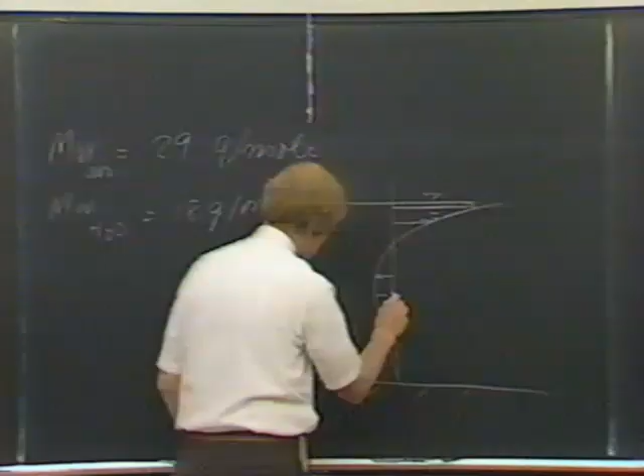The other problem, that is what the shear stress is on the bed, is complicated by those factors, that return flow. But usually the return flow is very much lower than other currents. Recall I drew a profile of the bed that looks like this. The shear stress due to this return flow is usually quite small. That 1/10 of tau s is just a kind of a rough number, but it's usually very small, and it doesn't affect the erosion of the bed very much.

But it does affect the direction of transport. That is, if the waves are stirring up the bottom, and there is even slow motion of this sort, then it can carry large quantities of sediment. So this tau resulting from this isn't too important as far as sediment transport is concerned. It is important as far as calculating wind setup. Remember that.

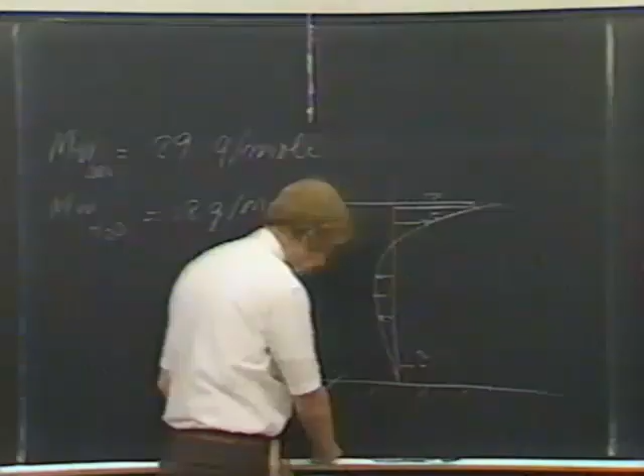I should also point out that the other factors that determine the current are the resonance that we talked about, the tidal current, and the oscillatory motion under waves. The tidal currents I've only alluded to, and I should say a few more words about that to clarify them.

The reason that tidal currents occur is that the ocean surface rises and falls. The effect of the sun and the moon on the water in the estuary, you can forget about that. The source of the tides and currents in an estuary are the rise and fall of the ocean at the estuary mouth. So when the ocean surface rises due to the tides, water flows into the estuary, and when the ocean surface falls below that of the estuary water, water flows back out. I'll show you some examples of that presently.

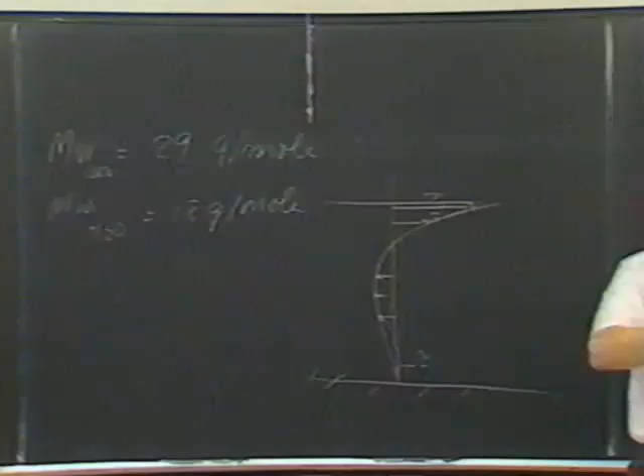But the point is, you can regard the water surface elevation at the mouth of the estuary as one of the boundary conditions, and not worry about the sun and the moon and so forth as far as the interior of the estuary is concerned. And of course that makes the water in the estuary flow in a progressive tidal wave up through the estuary. And the amplitude of the wave is damped due to friction in the estuary as it progresses up through the estuary. And I'll give you some examples of that in just a few minutes.

I'd like to turn to the topic of fresh and saltwater mixing that goes on in the estuary, because the processes in this so-called mixing zone are important in an estuary because they control sediment transport, salt transport, and play a big part in the biological system in an estuary.

If you consider first of all a system that has very little tide, so we can just look at the river saltwater mixture, then let's say something like the mouth of the Mississippi, which is a long delta. New Orleans is way up here somewhere, and this has a couple of passes in it in the delta out here, out into the Gulf. The tide range here is about a foot, or perhaps just slightly over a foot, so there's very little vertical motion in the Mississippi. And the water flows are appreciable.

Flows during the summer sometimes, or right after the snow melts, can be as much as 900,000 cubic feet per second. Really a large volume of flow. In that case, where you have a large freshwater outflow and a small tidal amplitude, you have very little mixing. And the result is, if we draw a profile along the axis of the estuary, of the outflow here, and I'll expand it vertically like this. Actually, I should go more realistic, where I've exaggerated the vertical scale.

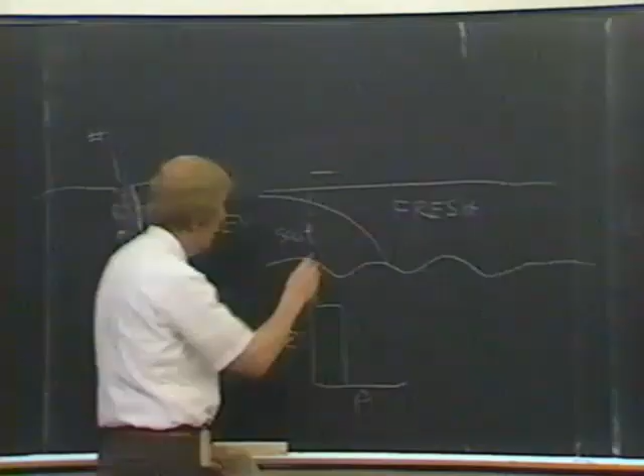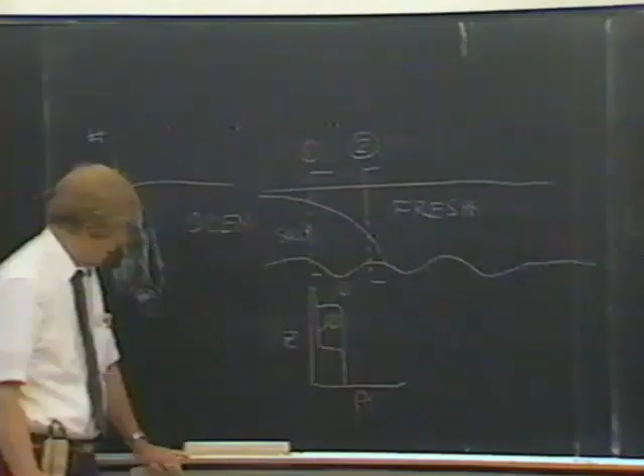Let's call this interface 1. So this would be 1. And if we go down further, call this interface 2, then what we find is that it looks like this. Very sharply defined interface. Sometimes at high flows, high freshwater flows, there are some waves that break on this interface, and there's a little bit of mixing there. While it's sharply defined, these waves can occur.

And the result is that there's a net flow, a slow net flow landward in the saltwater wedge, and a much stronger freshwater outflow at the surface. Well, this is the case in the Mississippi River. In most estuaries, however, there's a significant tide. In San Francisco Bay, the mean tide range is about 4.4 feet. So the mean tide range is about this much, and the spring range is not quite twice that amount. So you can see there's quite a bit of flow in and out of the Golden Gate.

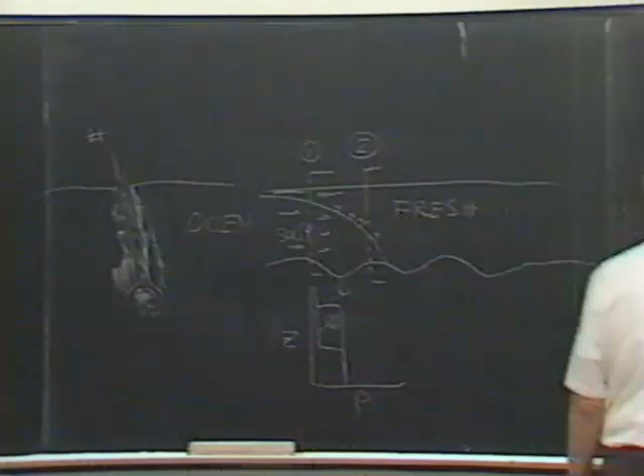And in that case, the estuary, before I get away from this, these bottoms: when the freshwater flow changes, if it is reduced, the saltwater wedge will move inland, and if it's increased, the saltwater wedge will move outward, particularly right in this region here, where the cross section changes a little bit with distance. When it moves outward, it often leaves a little pool of salt water in the depressions. I've exaggerated this because of scale, but it'll move out and leave this salt water, and the fresh water will flow over it. It'll just stay in this depression.

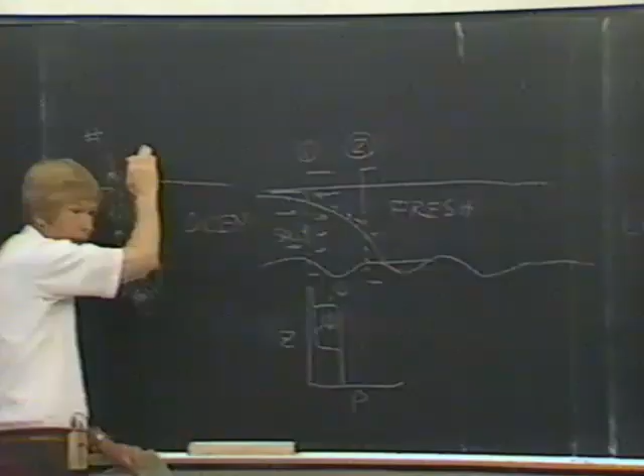This saltwater wedge problem affects water supplies upstream. New Orleans takes water out of the Mississippi and treats it, and so do smaller towns along the river. And if this wedge moves up into their area, then they get salt water in their intakes. A year before last, during a very low period of low flow, the wedge moved upstream and threatened these water supplies, and the Corps built a gravel sill, a low dam, out of local gravel in the estuary, and stopped the wedge at that level and saved the water supplies upstream. Then when the high flows occurred again, they just washed this out.

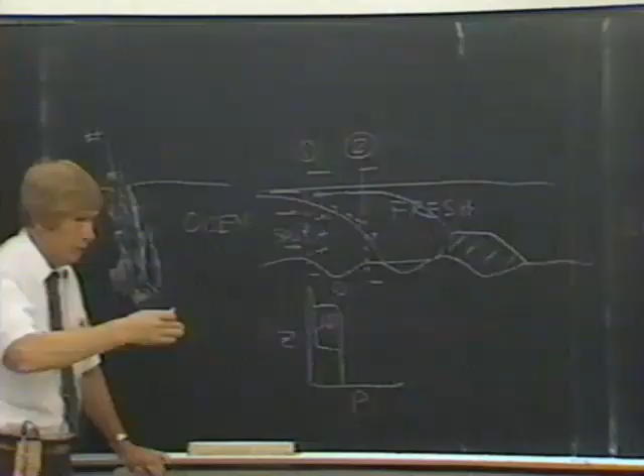It sounds simple, but stop and think a minute about all the things that were involved. First of all, they had to know that the sill would be high enough to do some good. And they had to know that it wouldn't be overtopped by the salt water going out. Second, they had to know that it would stay there during the flows under concern and wash out later. They determined those things by physical model studies. And because the situation developed quickly, they had to move fast for a government agency, and they built the whole thing in 1 month's time.

The savings in cost was incredible. If the city was without fresh water or had to bring fresh water from somewhere else, it would have been really a major problem. Well, that's kind of a sideline.

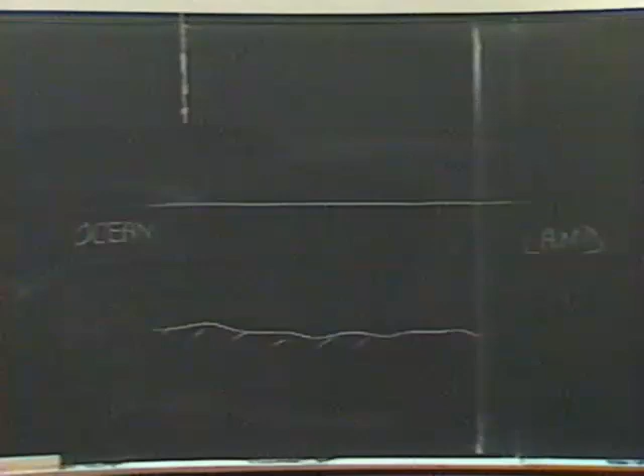In an estuary where there's a significant tidal current, the situation is a little bit different. This is idealized. But instead of having a wedge like this, the wedge has to move back and forth with every tide, with every rise and fall of the ocean. So this moving back and forth, together with the roughness on the bottom, causes upward mixing of the salt water. So you have a fuzzy, if you like, or a mixed apparent wedge where there's a net landward flow in the lower region. I've exaggerated that a little bit, but something like this, and a net outflow in the upper region.

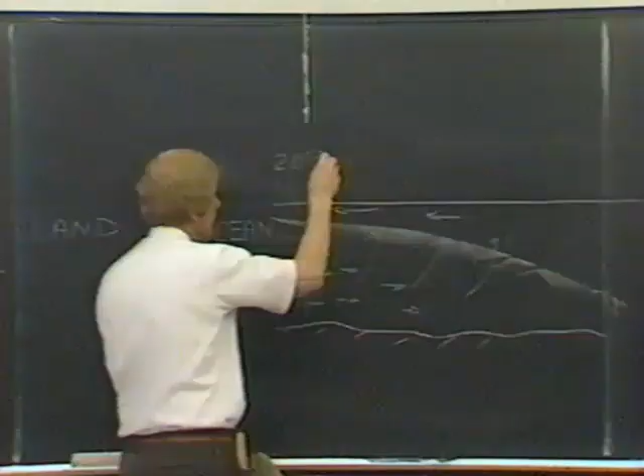And the salinity, it's mixed, and the salinity difference between the top and the bottom may be about 3 parts per thousand. That is not very great. Typically 2 to 3 parts per thousand. Up here, the salinity might be, say, 20 parts per thousand, and down here it'll be 22 or 23 parts per thousand. Not greatly different. And because of this mixing process, here it may be 2 parts per thousand further up, and down here maybe 5 parts per thousand, and so on up the stream.

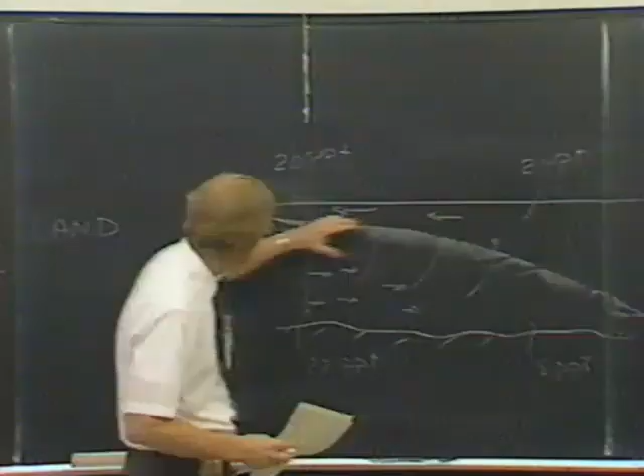So what happens is that as you go landward, the salinity decreases throughout the water body, but it maintains a difference between the top and bottom. Now this small difference, sometimes it's smaller than that, maybe 1 or 2 parts per thousand, led early modelers to believe that they could model this as a vertically mixed system. That looks like a small difference.

But it turns out that even that small difference causes a net landward flow on the bottom, an upward mixing of the more saline water into the fresher water, and that combines and adds to the water flowing seaward. So there's a net circulation in this way and back this way.

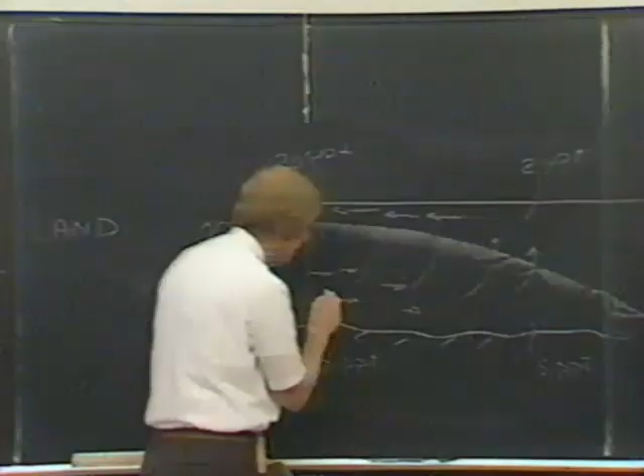The amount of that Q, if you want to call it Q ocean, divided by Q fresh, is on the order of 10. That is, the amount of ocean water that comes in and mixes upward and goes back outward is often as much as 10 times over this whole mixing zone, 10 times the amount of freshwater outflow.

You can see the implications of that for water quality management. It means that there's a huge amount of dilution that takes place of the river water that's due to the fact that the ocean water is coming in and mixing and going back out. It's lost, of course, if the freshwater flow is diminished to the point where you don't have this. I'm going to show you a little bit about that.

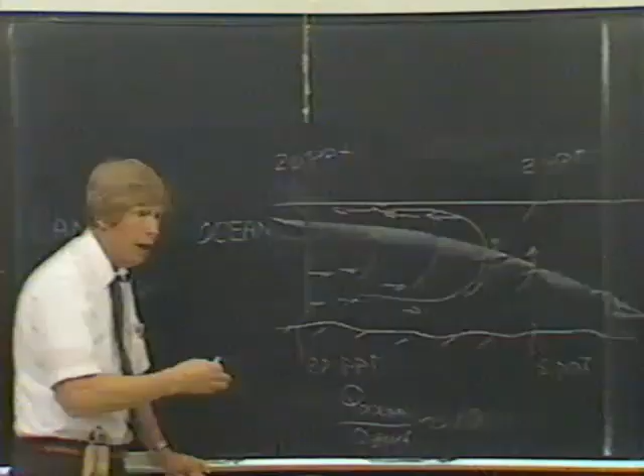As the freshwater flow is diminished for a given tide range, this will typically move up into the system where the cross-section is less. So reducing the freshwater outflow will reduce the amount of this mixing that takes place and move the whole system farther up into the system. You can see immediately the implications as far as water quality management are concerned. No?

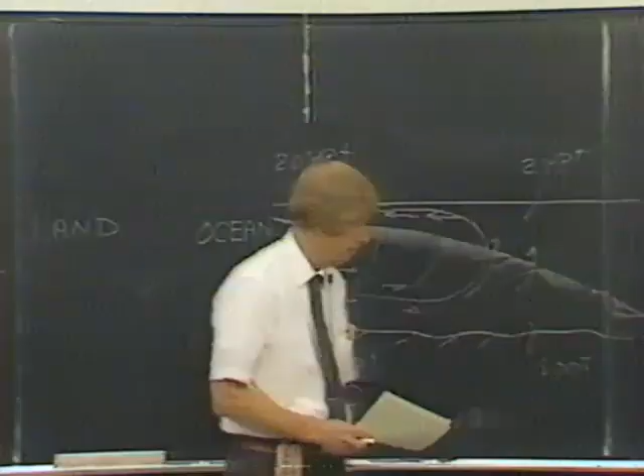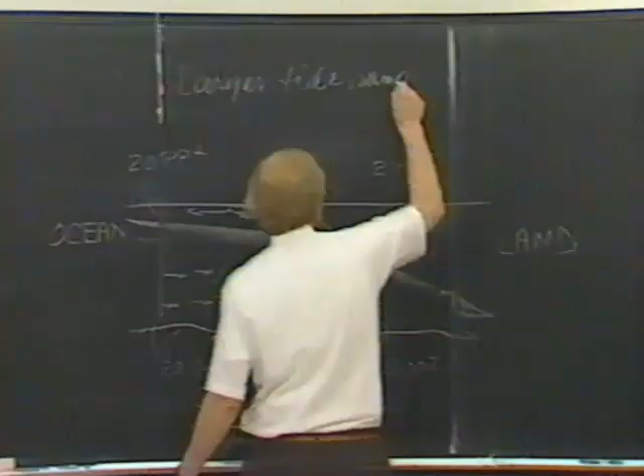When the tide range is small, I'm going to say more about this in just a second. Small tide range, relatively large freshwater flows. And this is larger tide range, smaller freshwater discharge. This is the more typical situation. The Mississippi is an unusual situation. This is much more typical.

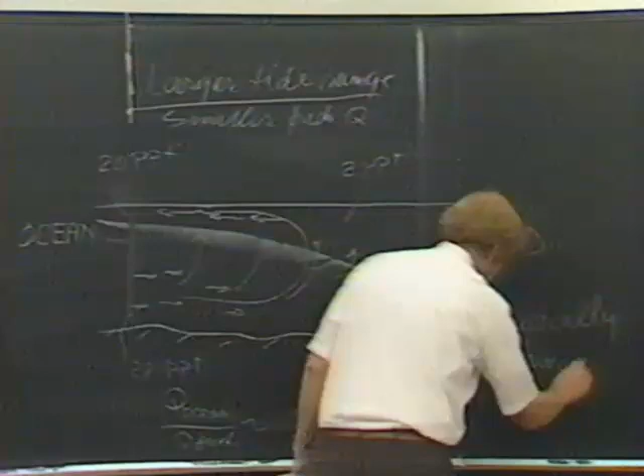These are referred to as stratified estuaries. And these are referred to as mixed estuaries, or partially mixed. But really, well, I'm going to give you some criteria in a minute. Really, the only distinction is degree. There are sometimes small amounts of mixing on the Mississippi, although it appears to have a sharp interface.

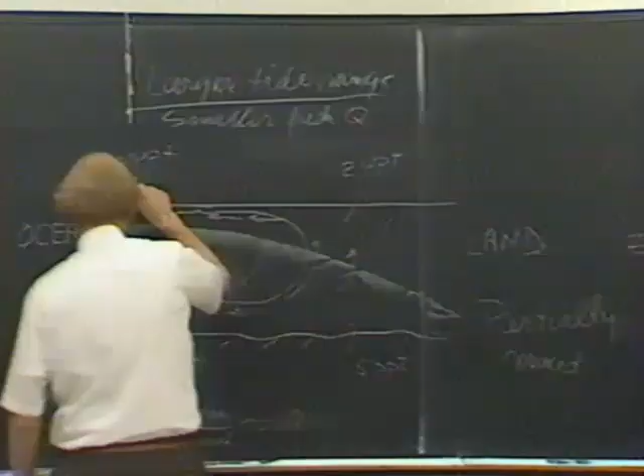If we plot the density here as we did there, let's say up here, what we find is something that looks like this. Usually there's a layer that's about uniform density near the bottom. And if we do it up here, what we find is something like that. I'm going to give you some numbers, yeah.

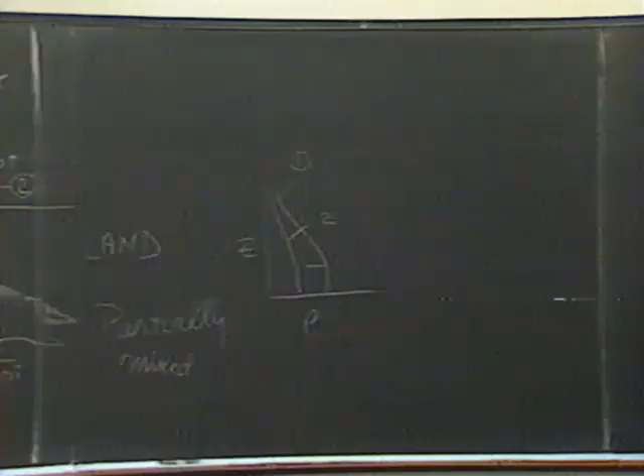But qualitatively, when you have a small tide range, so there's little disturbance by the ocean at the ocean end of an estuary, and a large freshwater outflow, the effect of the freshwater outflow dominates the system. Okay. When you have a larger tide range, then you have the combination of the two boundary conditions affecting the mixing of the system.

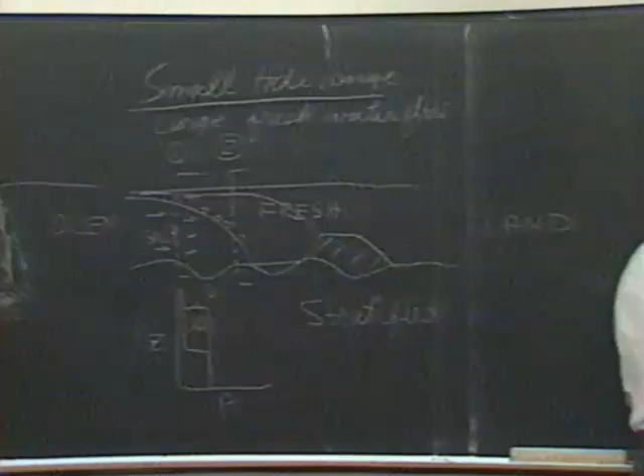For example, on the Sacramento River, how far upstream does this mixing occur? That's a good question. Can I enlarge a little bit? There's a question in regulatory agencies, and amongst some scientific people, of what constitutes an estuary. And my definition, which I think most people subscribe to, is it's the transition between the unidirectional freshwater outflow and the tidal saline ocean, and everything included in that is called an estuary.

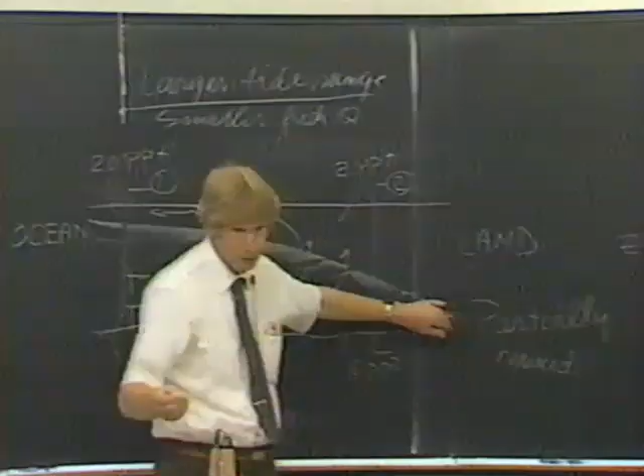That's the salinity. But the tide actually, during low flows, goes on up to Knights Landing. You know where Knights Landing is? So from the standpoint of the tide, not much of a tide at Knights Landing, but a small variation in water surface. At higher freshwater outflows, the noticeable tide is much further down. So the upper boundary moves back and forth with the freshwater outflow.

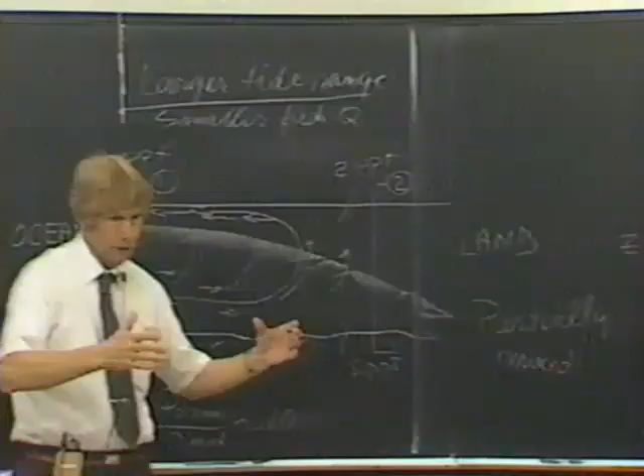The seaward boundary appears to be fixed at the Golden Gate because of the constriction. But actually, this freshwater outflow turbidity that comes along with the flood flows, I've seen out at sea, so that even that boundary can shift. I hope later to show you some San Francisco Bay pictures that help with that.

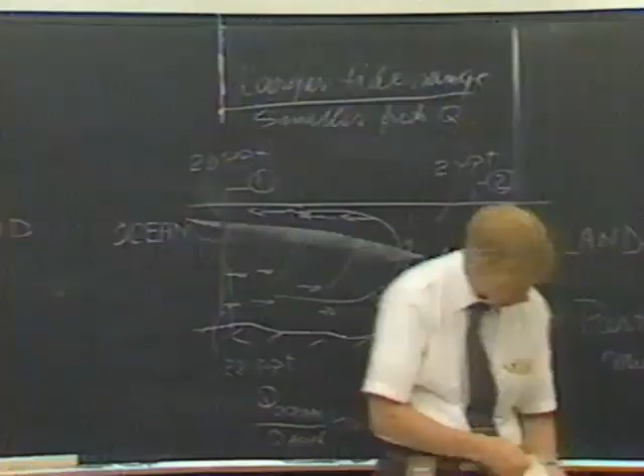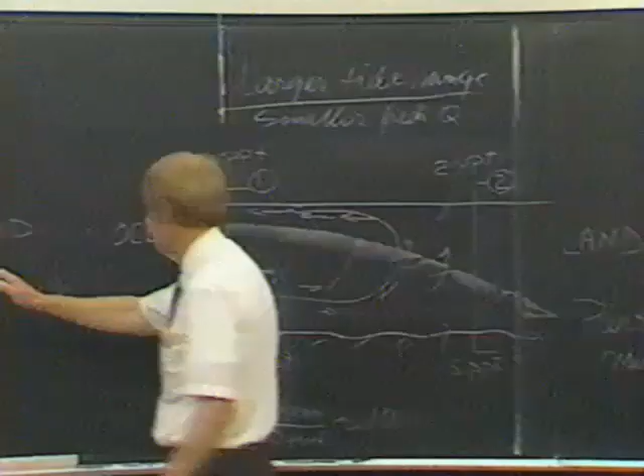Well, with this qualitative description, I'll give you some notes that people have recommended for classifying estuaries. Now, the motive for classifying estuaries is to try to put some kind of systematic description so that you can communicate. But in fact, there is a continuum of ranges. In some, the mixing is very, very strong, in the Thames and the Gironde and the Severn, those are good examples, where the tide range is on the order of 8 to 10 meters. Then, as you can imagine, this mixing is profound. They're very well mixed.

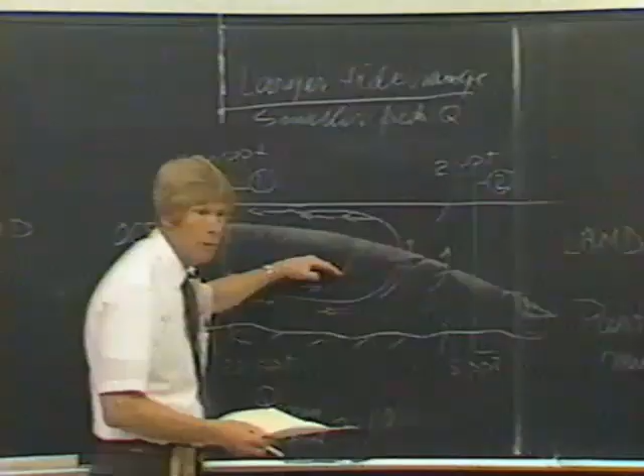Let me give you some examples of these classification schemes. If we describe the volume of fresh water outflow per tide period divided by the volume of the tidal prism, where the tidal prism is the volume that results from the rise and fall of the tide, that is the change in volume of the estuary with the rise and fall of the tide, and for that they take a mean tide. When this is greater than about 0.8, it's called stratified.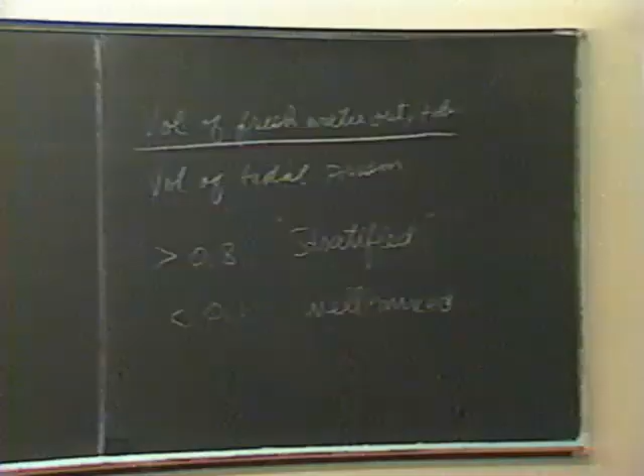And well mixed, it's less than 0.1. And in between, it's called partially mixed, of course. Now, that's a pretty rough kind of a description. Harleman and Ippen, two professors at Massachusetts Institute of Technology. Professor Ippen is no longer living, but Professor Harleman is still pretty active. They gave an estuary number.

And that is the P sub T, I'll define these in just a minute, times F sub O squared, divided by Q sub F, freshwater outflow, times T. This is the tidal period. That's the freshwater outflow, discharge. P sub T is the tidal prism. And the F is the Froude number.

Densimetric, or the Froude number, equals U O, where U O is the maximum flood tide velocity, divided by the square root of g D, where D is the average depth. And this is regarded as the estuary number.

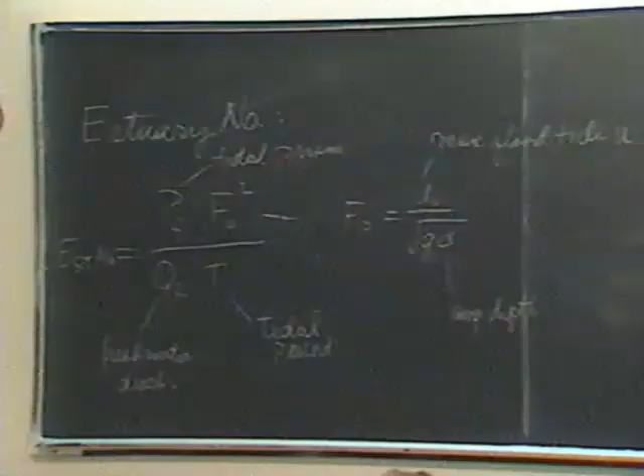Another relation given by Harleman and Ippen is the velocity predominance. Before I give you that, I better describe velocity predominance for you. If we look at this diagram, and

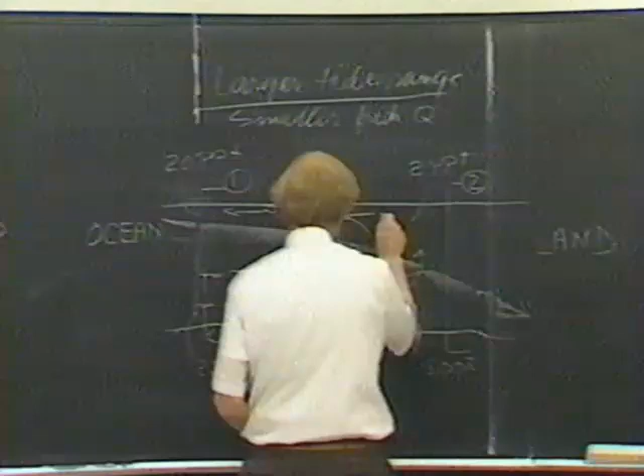say we measured the currents along some section here from top to bottom, and we measured them throughout the tidal cycle, what we would find is that at the top, let's say at position A, this is flood, and this is ebb being toward the sea. What we find is that the ebb would be very large compared to the flood. Looks something like this.

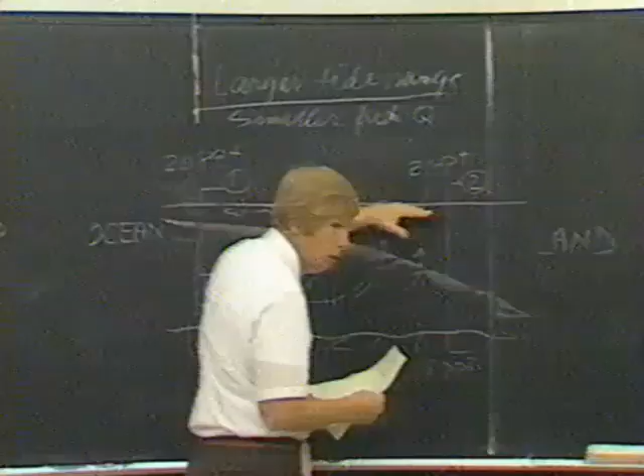That means that there's more water flowing out near the surface than flows back upstream. That fits in with the secondary circulation pattern that I described, or gravity circulation. Now, if we measure it down here at the bottom, call it B, what we would find is that the ebb would be relatively small, and would last longer than the flood, but, I didn't make that quite large enough, there would be more flow upstream near the bottom than downstream near the bottom.

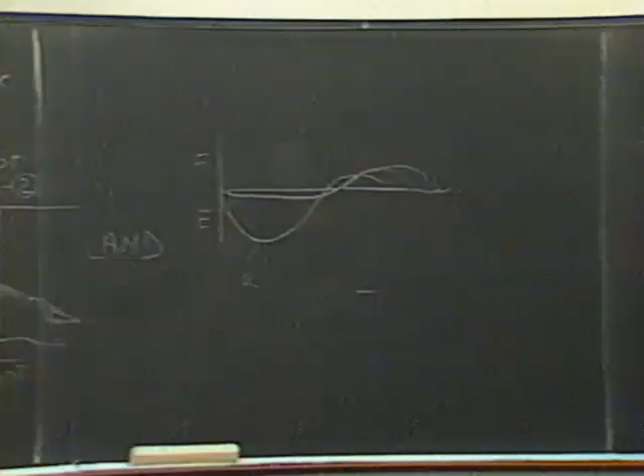You follow me? So if we look at this area here, that's the distance that the water flowed upstream. This is u, the velocity. The velocity times time is the distance the water moved, right? So we can take this area A and this area B and plot what's called the ebb predominance, which is equal to ebb A divided by A plus B. The area is A over A plus B.

And this is the distance up from the bottom. We better call this 0, and let's call this flood and this ebb. At the surface, there would be very much ebb predominance, and it would look something like this. That is, this is A. I'm sorry, at this location. I don't have that quite right. Where A is about here, and B is about here. And in between it would look something like that.

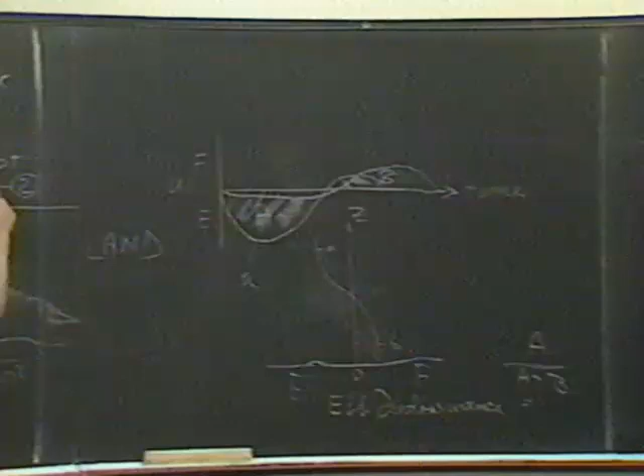So if we measured it at a number of elevations, we would get a curve that looks something like this. If we were to go further upstream and make the same measurements, we would get something that looks like this. That is, if we were to go to position 2. This crossover point is the point roughly at which the net upstream and downstream flow is the same.

Have I confused you? I see a lot of blank faces. Let me run through that again. Is what? Ebb and flood. Let me write it down again for you. We'll start with a clean slate, okay?

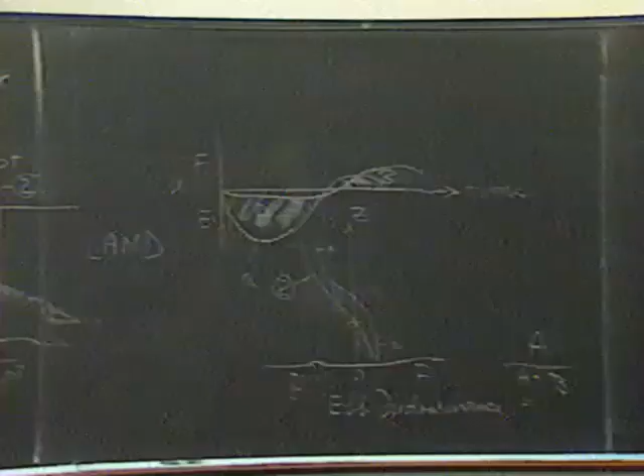We have a mixing zone. I'll draw the region of mixing, something like this. And let's consider location 1 and location 2. And recall I said there's a net inflow near the bottom, upward mixing all along this region of mixing due to the back and forth motion of the water resulting from the tides and friction of the walls, and a net outflow near the surface.

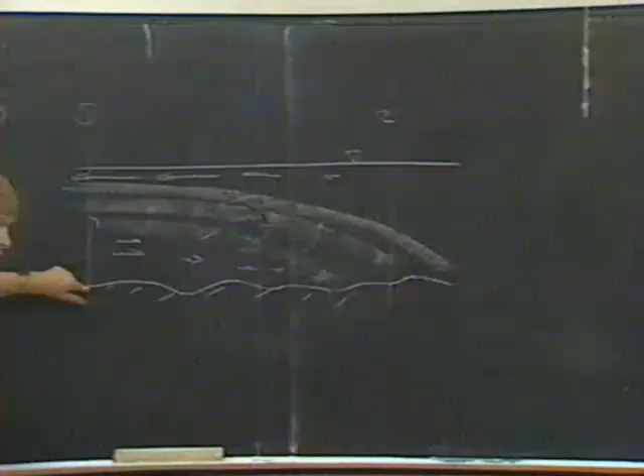Something like this. If we measure the currents here, that's at 1, as a function of time. And this is ebb. Oh, this I called flood before, isn't it? Yeah, flood. And this is ebb. Velocity during ebb. Ebb is when the water is moving toward the sea. Flood is when the water is moving toward the land.

Okay. Then near the surface at location 1, the flow is predominantly ebb. That is, the river water is flowing toward the sea near the surface more than it's flowing toward the land. So during a tidal cycle, the currents now would be ebbing at the surface, and the ebbing at the surface would be more pronounced than the flood. That is, there's stronger ebb flows during a tidal cycle near the surface than there is flooding flows.

So this is 1. This is 1A. Okay, right near the surface. That's in 1A. Here. Before I go on, I'll redefine this.

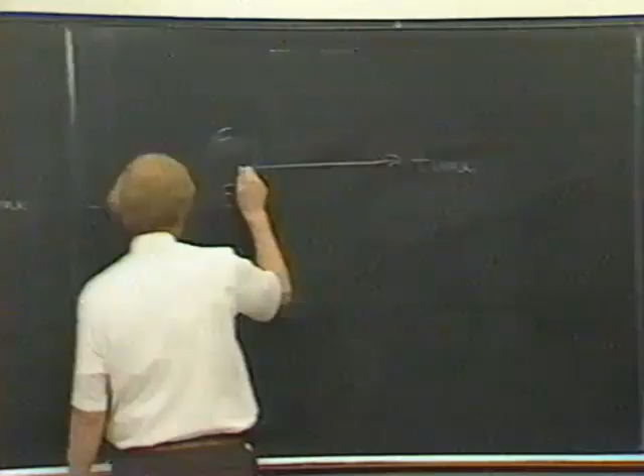If we plot U at E, a flood and an ebb, this is 0, with time, then call this area here A, and this area here B. Then we call ebb predominance equal to A divided by A plus B. This is area A. That's the distance that it moves.

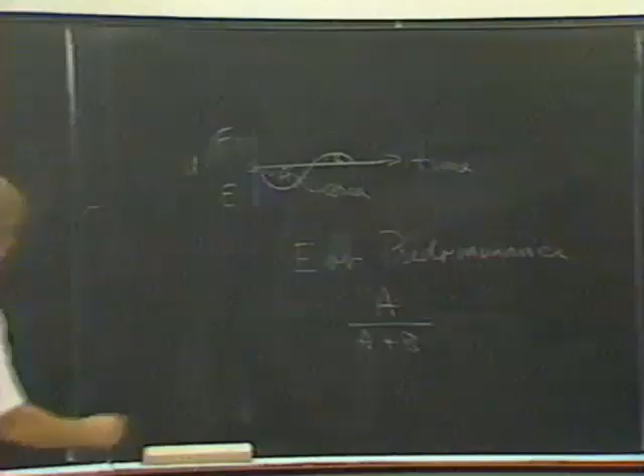Okay, now if we make a measurement down here near the bottom, well, I'll make 3 of them. We'll call this B and this C. Okay, 1A, 1B, and 1C. Now if I look at B, then you'd expect something a little bit different. See, near the bottom, it'll cross something like this. And then if you look at 1C, what you'll find is that it'll actually come across like that.

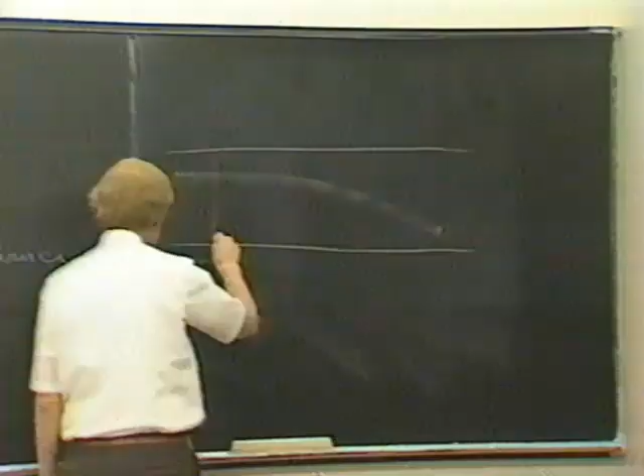If we look at distance up the estuary again, where we have some kind of a gradient in the salinity here, if you plotted this potential energy, then because of the density change, you'd have an increase in hydrostatic pressure, like here. But at this point, the slope would change, wouldn't it? So this is the ocean out here. Instead of a straight line hydrostatic pressure, we have a change like this. Down here, it would look like this. I think I've drawn that pretty well.

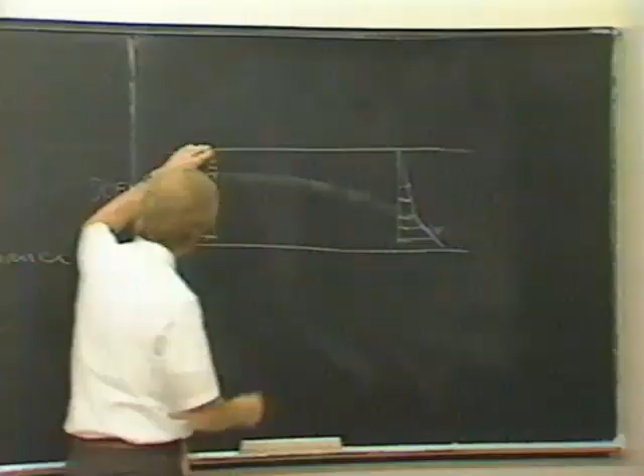So while you may have a slope in this direction at the surface, at the lower part of the elevation, you may have a pressure slope in this direction. So right at the change of tide, as slack tide comes by, at first the change occurs at the bottom and then later at the top. I'll show you some actual data presently, though I may not get to it today. But the problem is you're dealing both with a change in slope of the water surface due to the tides and a change in the hydrostatic pressure distribution due to the stratified density of the system.

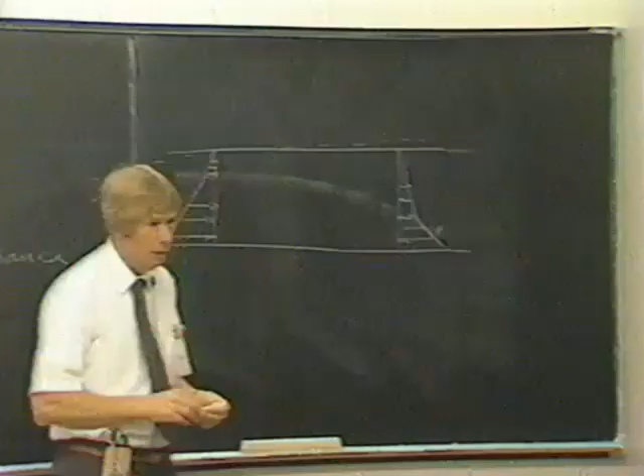You follow me? One more question about the axis of time. Is that real time, like time zero, you start with each curve, or you shift it so they all start? Let me show you some real data, because it changes on ebb and flood. So just hold that for a little while. I'll show you some actual data.

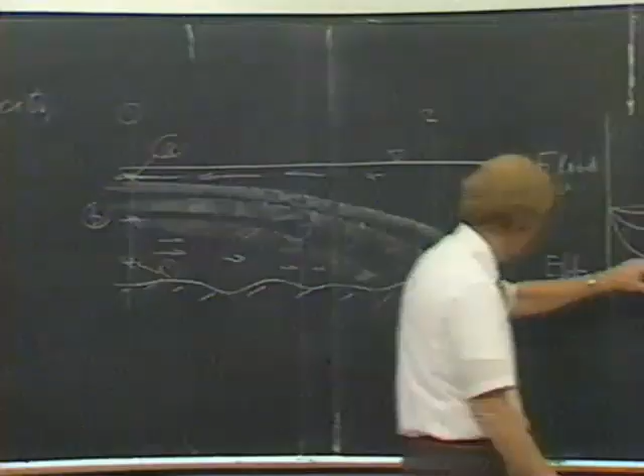Well, now, if you plot for each of these curves the ebb predominance, and you'll see the significance of this presently. This is 0. Well, let's see. Probably I'd better put this in terms of a fraction, so that would be 0.5, the way I defined it here.

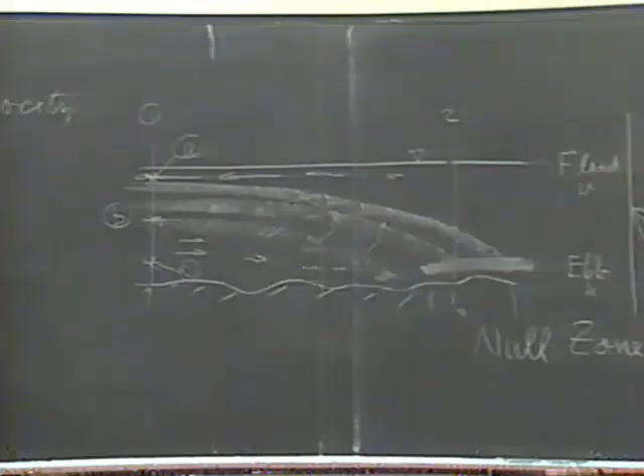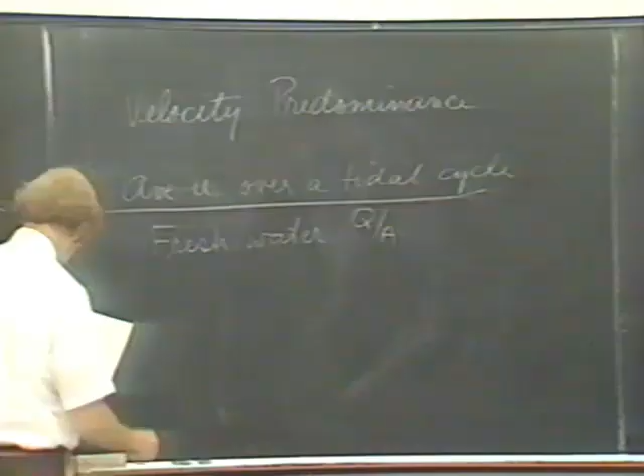Before I get away from it, the last number produced by Ippen and Harleman is velocity predominance, following this kind of an argument. And that's the average velocity u over a tidal cycle divided by the freshwater inflow velocity, Q over A, where A is the cross-sectional area of the body. This is U sub B, near the bed velocity, averaged over time, divided by the freshwater inflow velocity, I'll call it V sub F.

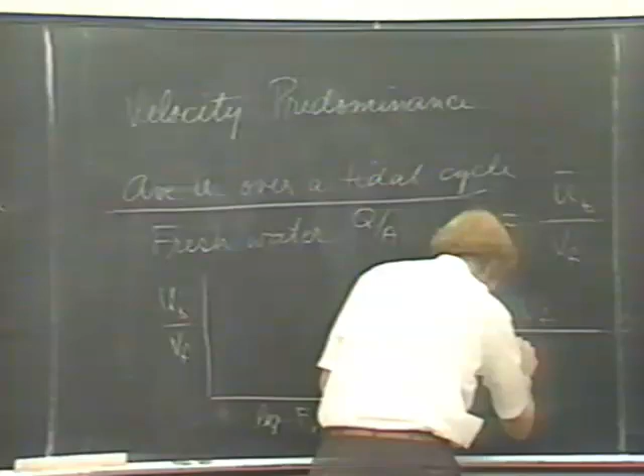And what they found was that if you plot for a number of estuaries U sub B over V sub F against the densimetric Froude number on a log scale, like this, where the densimetric Froude number is equal to the freshwater flow velocity divided by the square root of delta rho over rho at X times gH, or gD as I used before, where X is measured from some seaward distance.

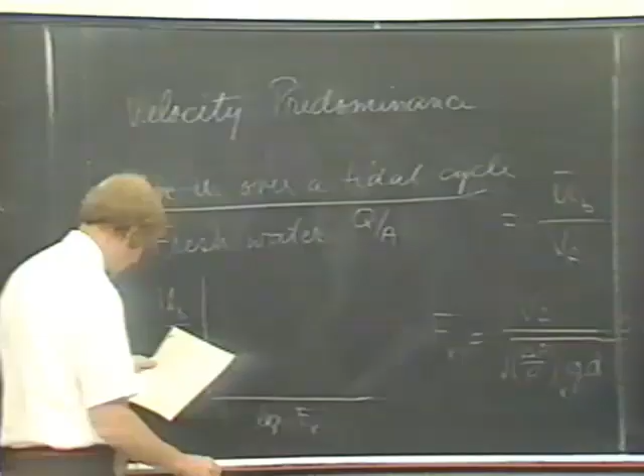What they found, seaward location, what they found was that there was a relationship between these two with distance that would occur along the estuary. And at different points along the estuary, there would be a relation like this.

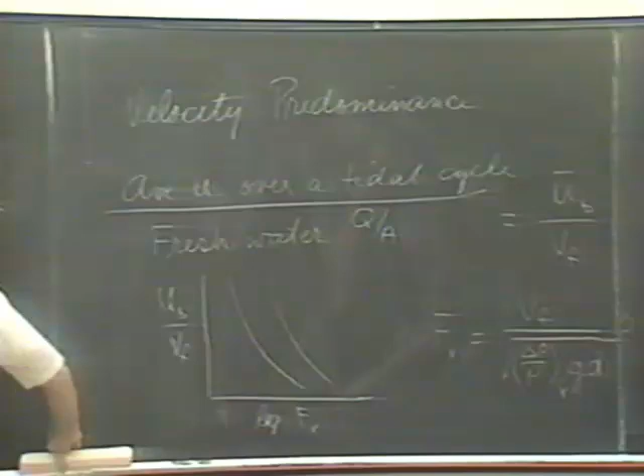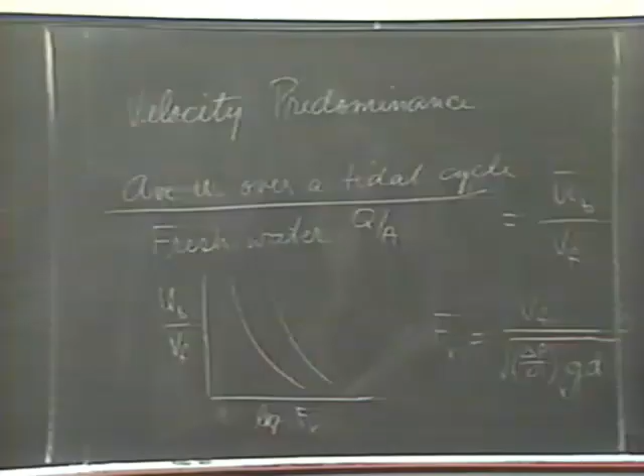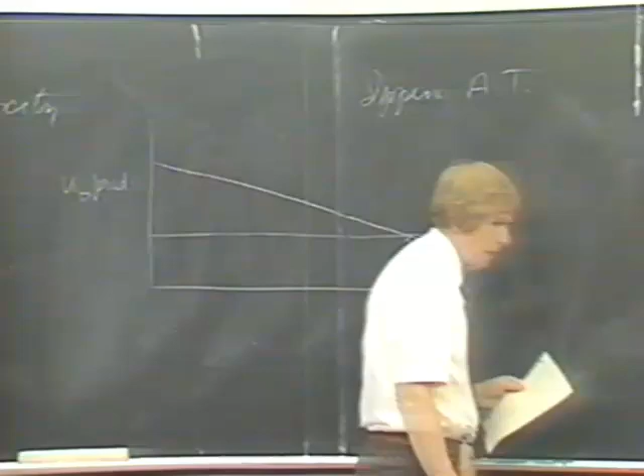If you want to look further into this, we won't go back to this anymore. I just wanted to show you the correlation. You should see that book by Ippen that I referred to before, Estuarine Hydrodynamics. The reason we won't go into this further is that it's been pretty much superseded by modeling, and we'll talk about that. But you should know about it for historical interest.

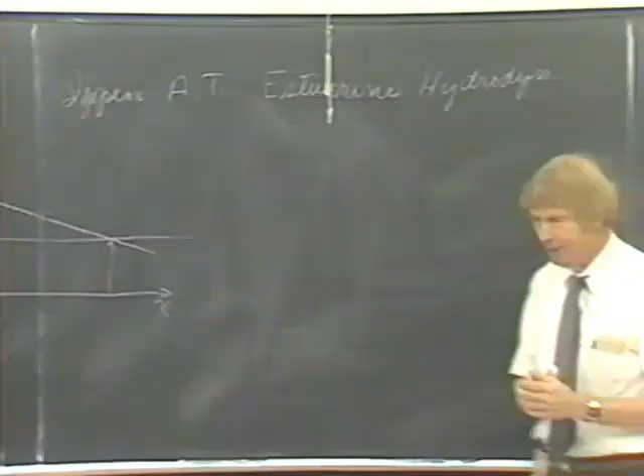On your diagram, what is the horizontal line? That's the 50% point that I had. Thank you. That, just like this null zone, or this ebb distance predominance that we described before.

Well, I had planned to show you some pictures, and I think what I'll do is save the pictures for later, but show you a couple of slides, a couple of view graphs that give you some idea of the.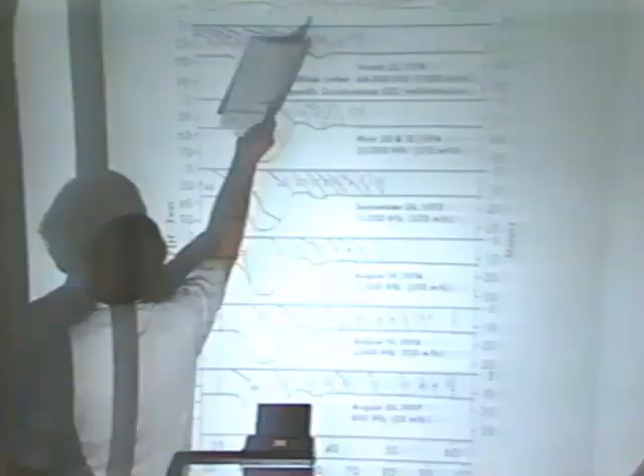This is a plot of salinities measured in the San Francisco Bay system for different freshwater outflows. This is Carquinez Straits, this deep part, and this is a profile from Carquinez Straits up toward Chips Island. Chips Island is up here. Now, what do you see up there? Chips Island is right there, so you can relate this to the position in the western delta. And this is Carquinez Straits, this deep spot. The vertical scale is exaggerated.

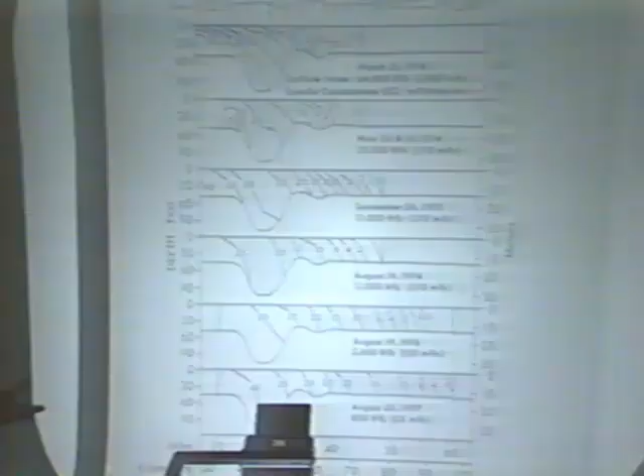The top plot is for freshwater outflow of 64,000 cubic feet per second. The freshwater outflow index is a computed freshwater outflow based on a summation of the river inflows into the delta minus some supposed evaporative losses or consumption in the delta. And if there's flow out through the Yolo bypass, that's included. So it's a computed by difference freshwater outflow. It's in error sometimes at high flows, but it's a reasonable estimate. The problem is you can't measure the flows very well in a tidal system. You measure differences in it.

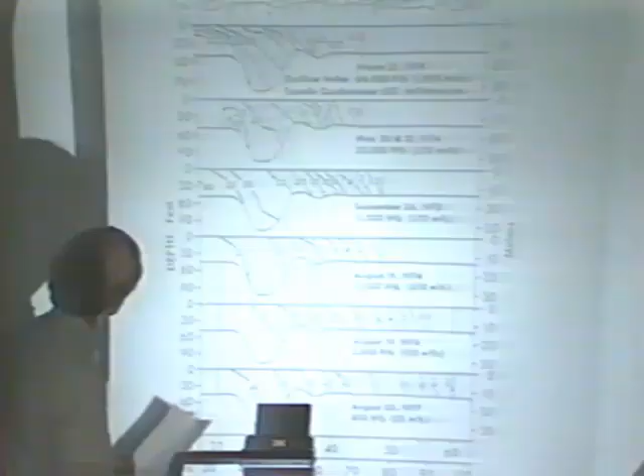You can see that with very high freshwater outflows, the water is fresh down to about Collinsville. And then the change in salinity increases rather rapidly. Remember, seawater salinity is about 33 to 34 parts per thousand. So you can see this is nearly seawater salinity right at where it enters San Pablo Bay. The bay widens out and the seawater can intrude more easily there. At high freshwater outflows, and then as it's reduced down to 20,000 cubic feet per second, you'd expect it to move back upstream. Now let's see, that's May.

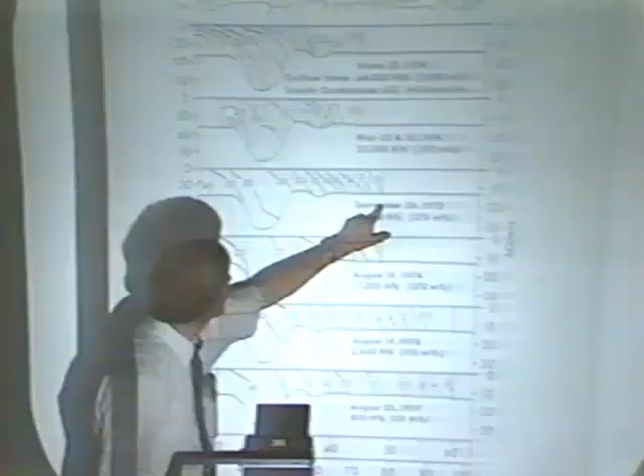I don't know why it isn't, but it isn't. That doesn't seem, oh yes, it is. This is 0.15, and this is 0.5 here. We just don't have the rest of it. Then at 13,000 cubic feet per second, you can see it's moved upstream, 0.15 is near Chips Island. And then later on, it took apparently some time to move upstream, or the history between September and August of 94, it hadn't yet readjusted. This is 1 part per thousand, so 0.15 was way up here somewhere.

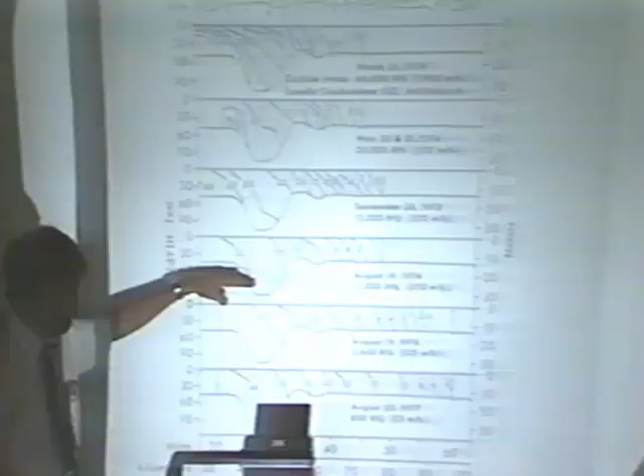And here it is, 3,600 cubic feet per second. 0.15 was up here somewhere. And at 800 cubic feet per second, it's definitely up in the delta somewhere. So you can see that as far as salinity, the position of the front changes with freshwater outflow. Also notice that it's spread out more with low freshwater outflows than with higher freshwater outflows, where it tends to be bunched up. Now it takes some time to adjust to a change in flow. That's not reflected here, but it doesn't take very long.

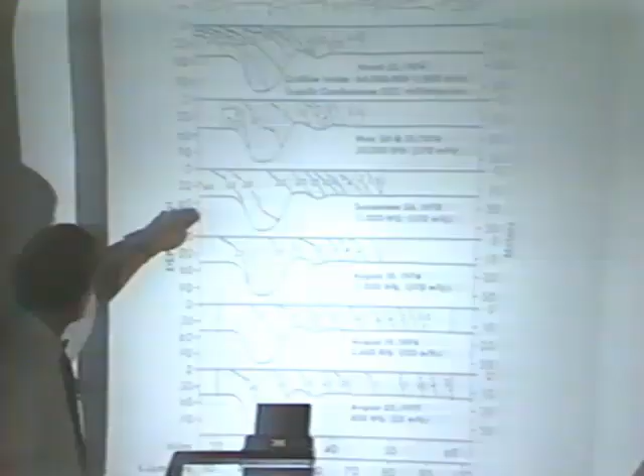Andy? You were mentioning that on the downstream side for September and August there, with the same indexes, that's above seawater. There's evaporation on San Pablo Bay. That's called a negative estuary when you see that. South San Francisco Bay is a negative estuary. There's more flow into it than out because of evaporation. Similarly here, August.

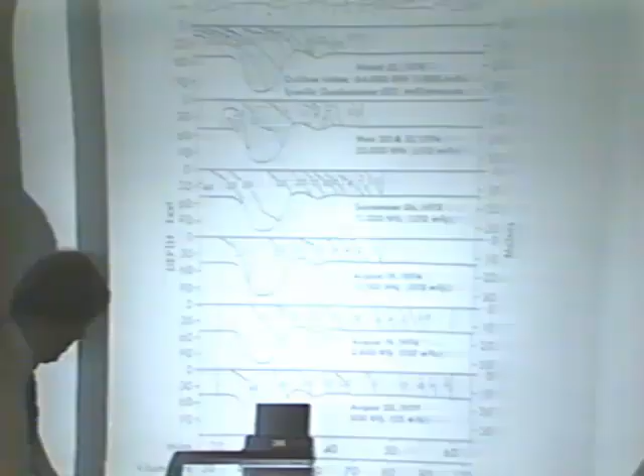Well, it's spread out. The dotted area is referred to as a mixing zone. Actually, it extends out here. And I think this is, well, this is related to some other data. The important thing is the salinity, to see how it moves upstream with lower freshwater outflow, and how the change in it tends to spread out.

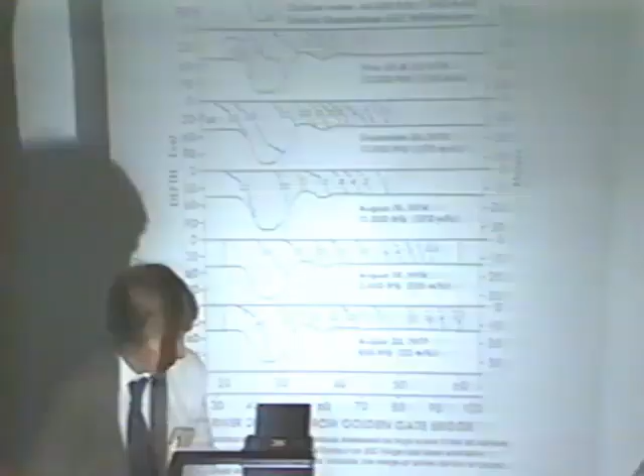The algae picture is complicated by the presence of Suisun Bay, which is a fairly large, shallow bay. And it appears that the algae multiply there, but their numbers are affected by filter feeders, mussels and clams and so on. Clean them out. Well, I don't want to get off into water quality just yet, but to point out that it is important there. Now, from the standpoint of sediments, I'm going to show you this at a later time.

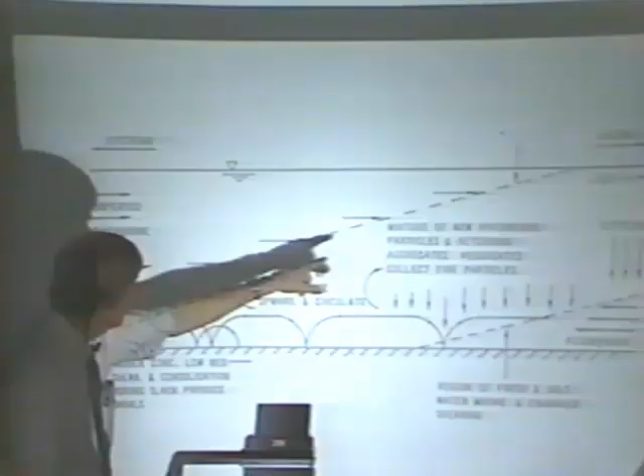This mixing zone can be described this way. This is the upstream end, and the ocean end is the far end. We have riverborne suspended particles, dispersed particles coming into the system and mixing downstream and settling in the large shallow bay or downstream. During windy periods, they're resuspended and carried upstream with a net upstream flow and deposited each slack water when the water reverses direction.

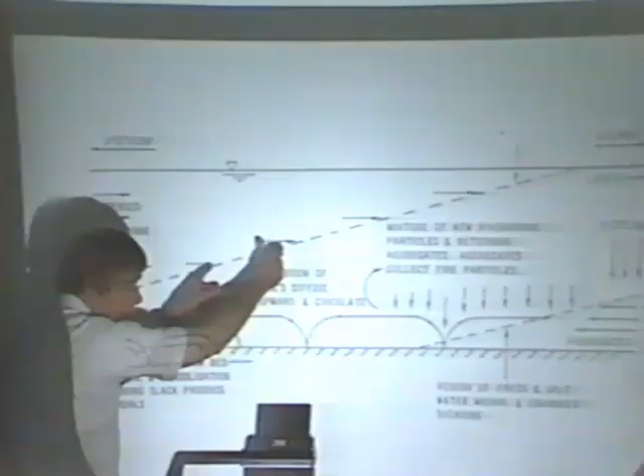And as I'll show you later, they may deposit and be resuspended, but the upstream motion is farther, remember the flood predominance, than the downstream motion. So there's a rectification, that is a net flow landward near the bottom. And these are heavier aggregates that tend to settle in the bottom, but they're of course mixed upward, and the finer aggregates mix up more easily than the coarser ones, but they mix in with the riverborne suspended particles and aggregate with them, large numbers of particles and a few larger particles, so it promotes aggregation.

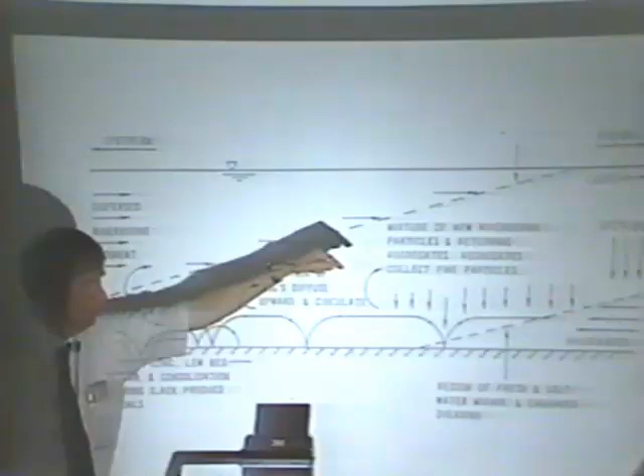The velocity gradient in this whole region is high because of the density gradient. I'll show you this again. So that aggregation is favored in this region. And of course the ones that aggregate go down and settle and go back into this system. So we have a trap. That is, if the particles can settle somewhere downstream, then they're carried back upstream near the bottom. And those that mix upward are carried back downstream. So we have a gravity circulation not only of the water, but also of the sediment. You can see that the long times involved, repeated cycles, combined with relatively higher, but not too high, velocity gradients in this region, promote aggregation of the particles and tend to trap it.